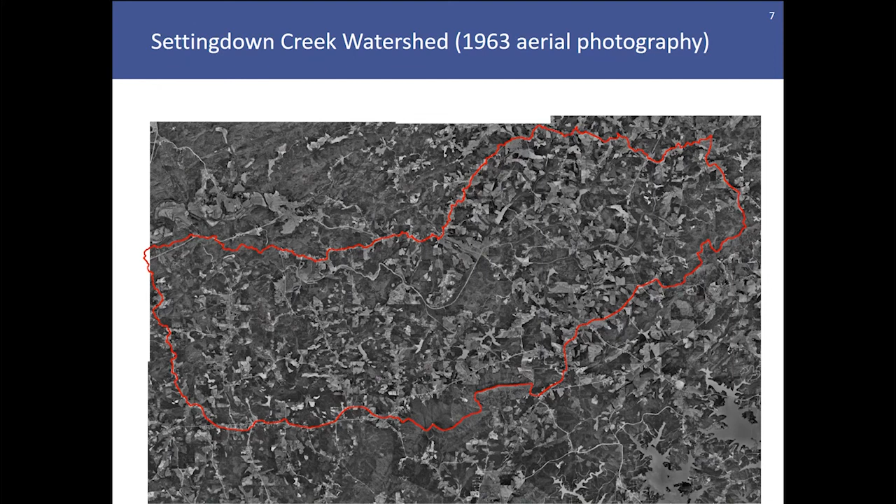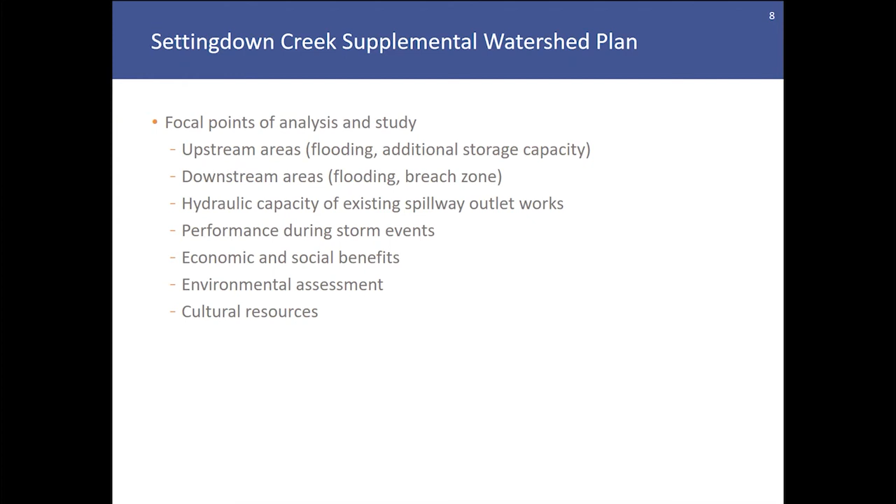As part of the supplemental watershed planning process, upstream areas of the dam were assessed for flooding, as well as to determine the need for additional storage capacity in the lakes. Downstream areas were also evaluated with regard to flooding and hypothetical breaches of the dam. The hydraulic capacity of the existing spillway outlet works was assessed during a variety of storm events. The economic and social benefits provided by the dam were quantified, and an assessment of environmental and cultural resources was also performed.

Settingdown Creek Dam number 59, which is the subject of this presentation, is a dam that meets Georgia Safe Dam Program criteria to be considered a Category 1, or high hazard potential, dam. This means that failure or improper operation of the dam would likely result in the loss of human life. The dam requires an operating permit from the SDP.

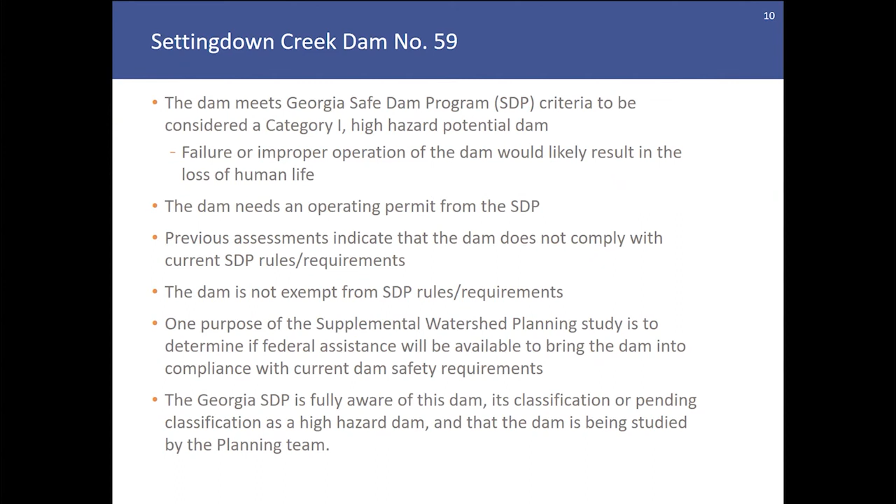Previous assessments indicate that the dam does not comply with current Safe Dam Program rules and requirements. The dam is not exempt from these rules, and a purpose of the planning study is to determine if federal assistance will be available to bring the dam into compliance with current dam safety requirements. The Safe Dams Program is fully aware of this dam, its classification or pending classification as a high hazard dam, and that the dam is being studied by the planning team.

Some original features associated with the design of the dam are that the dam was not originally designed as a high hazard dam. Development has occurred downstream of the dam, requiring changes to the original hazard classification of the structure. The purpose of the dam is flood mitigation, and a secondary purpose is sediment accumulation and storage.

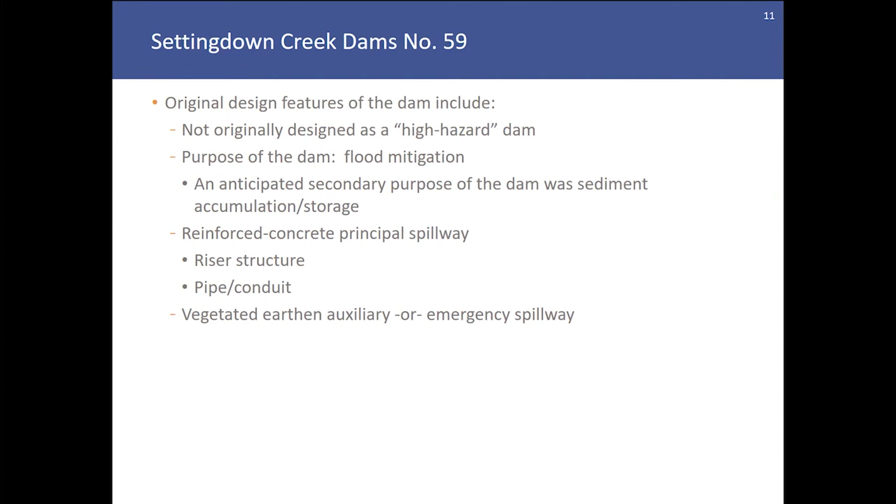The dam includes a reinforced concrete principal spillway system composed of a riser structure located in the lake on the upstream side of the dam, with a nearly horizontal pipe or conduit that conveys water from the riser structure through the earthen embankment and to the outlet channel at the downstream end of the dam. The dam also includes a vegetated earthen auxiliary or emergency spillway designed to pass flows associated with low frequency, high intensity storm events.

The dam is located adjacent to the Hampton Golf Club, south of Glenhaven Drive. Construction of the dam was completed in 1954, and the dam appears on the National Inventory of Dams with a surveyed height of 33 feet.

The drainage area at the dam is approximately 1.8 square miles, and the design storage capacity of the dam is 586 acre feet. That storage accounts for sediment storage below the normal pool elevation of the lake, flood storage between the normal pool elevation and the auxiliary spillway control section, and surcharge storage between the auxiliary spillway control section and top of dam.

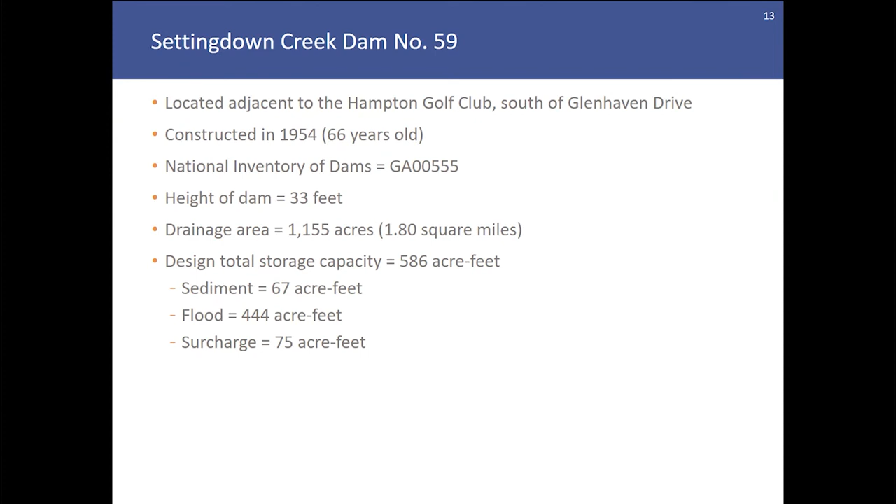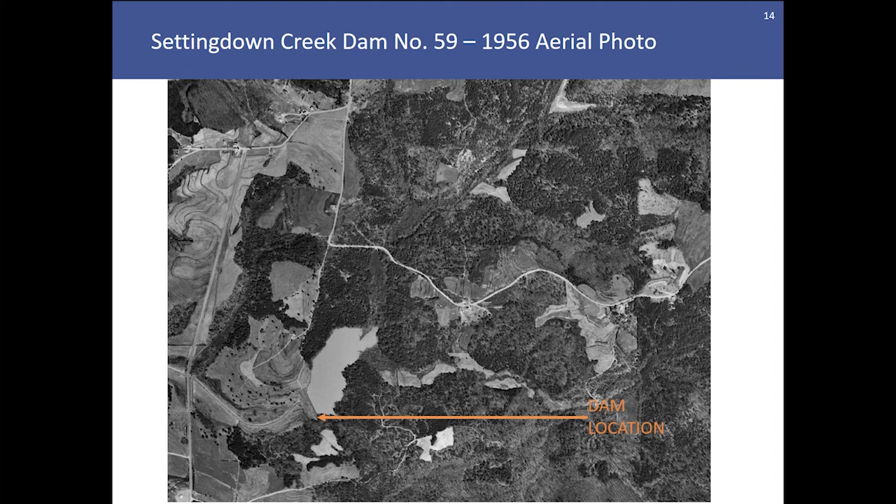Here's an aerial photograph taken in the 1950s, which also indicates the location of the dam. As you can see, there's been no development adjacent to or upstream of the dam in this aerial photograph.

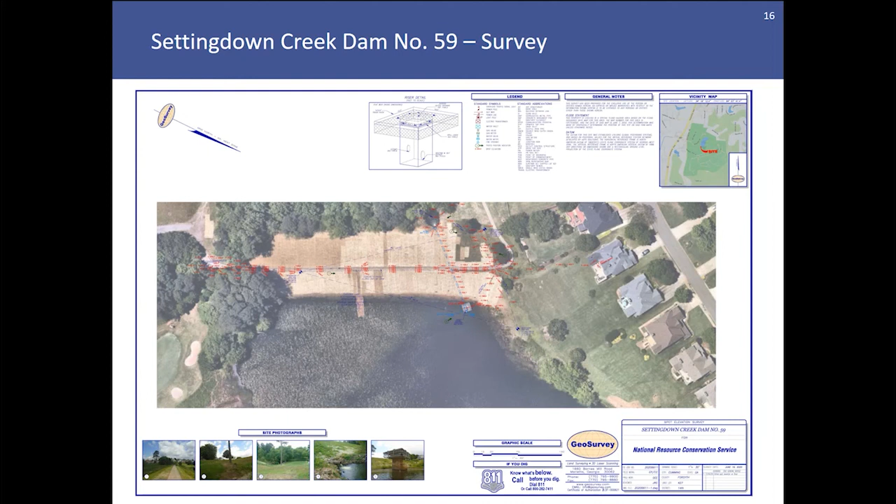This slide shows a topographic site plan of the dam. For reference, we're showing the principal spillway riser structure and pipe, along with the alignment of the auxiliary spillway. As you can see, the properties at the right side are immediately adjacent to the auxiliary spillway channel.

Also, the approximate limits of wetlands that were delineated as part of the environmental survey are indicated downstream of the dam at the top of the page. The lake would be toward the bottom of this view.

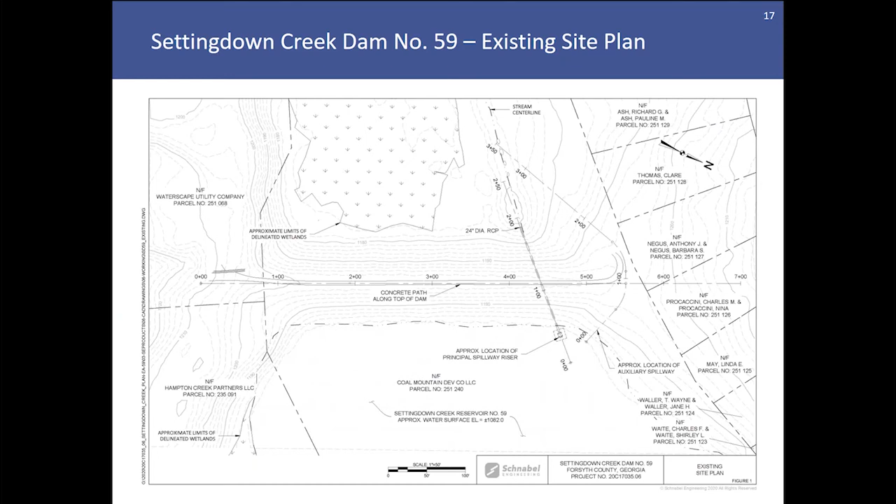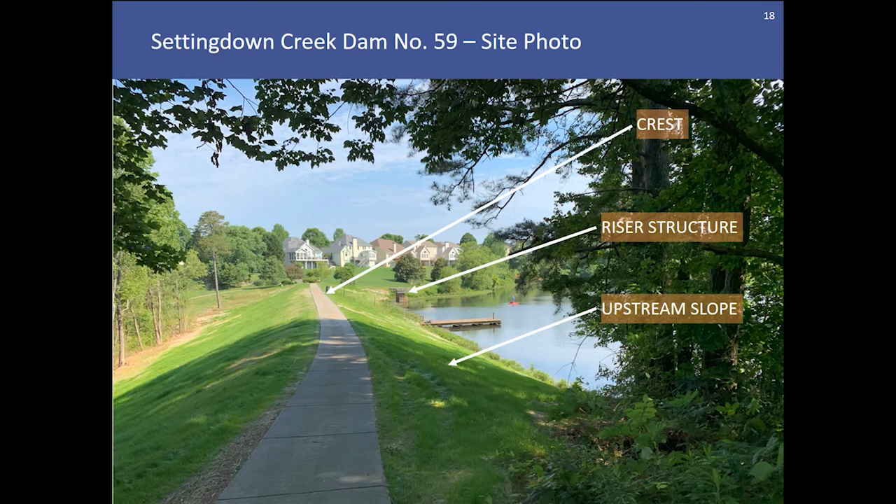We have a couple of photographs of the dam. This photograph is taken from the left abutment area at the crest, looking toward the principal spillway system and the residential homes. Indicated on this photo are the crest of the dam where the golf cart path is located, the riser structure, the concrete structure in the lake, and the upstream slope of the dam where the dock projects.

This photograph is taken from the downstream slope of the dam. As you can see, the downstream slope is in the foreground. The concrete principal spillway conduit outlet is indicated, and the riprap lined plunge pool is also shown in this photograph.

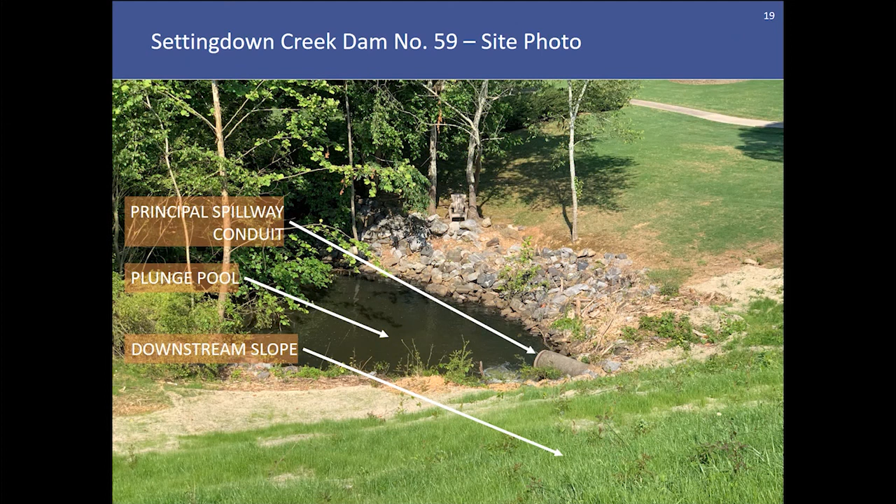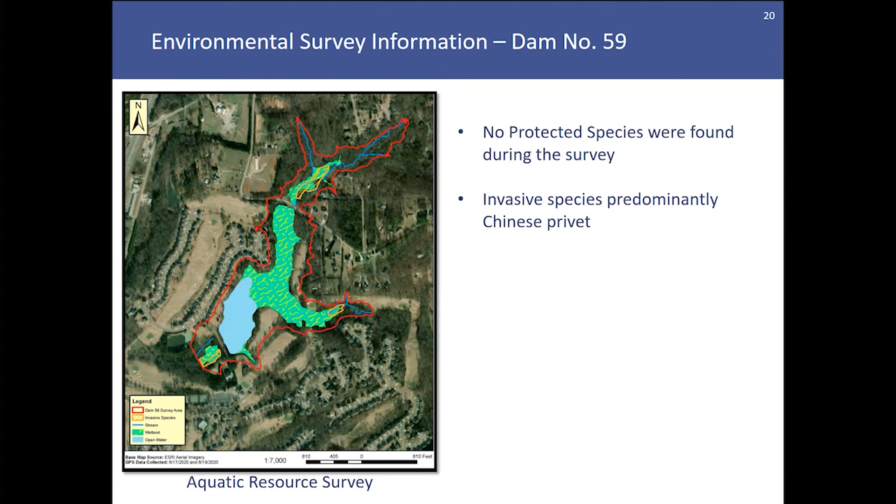As part of the planning study, an environmental survey of the dam and its vicinity was conducted. The aquatic resource survey exhibit shown here on the left side of this slide indicates the limits of the survey area, along with the locations of streams, wetlands, and open water identified by the environmental survey team. Invasive species in the form of Chinese privet were also indicated on this exhibit. The environmental survey found no protected species during the performance of the survey work.

A phase 1 cultural resources survey was also performed of the dam and its immediate vicinity. The cultural resource survey map on the left side of this view shows the location of survey transects and shovel tests that were performed as part of the survey. In addition to the field survey, a literature review of the project area, the dam area, was also conducted. No archaeological resources were recorded as a result of the survey work.

The dam, being greater than 50 years old, is technically eligible for the National Register of Historic Places, but its listing on the registry is not recommended.

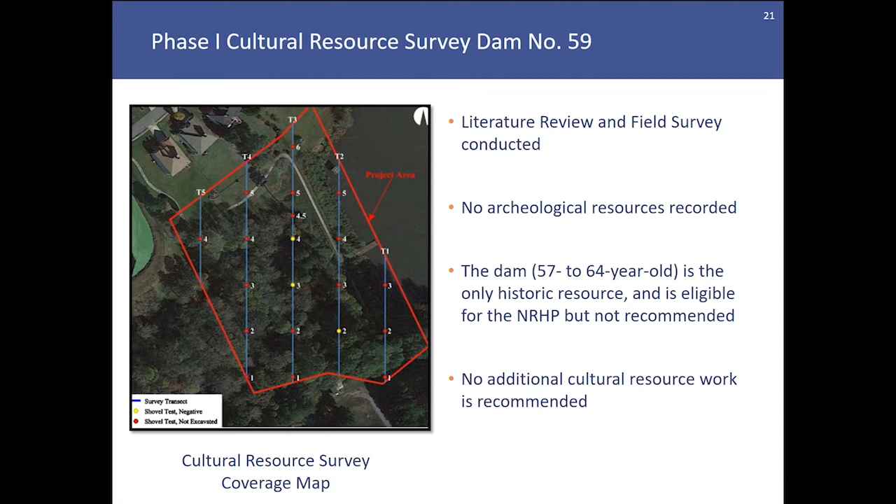The dam, although old, is not a unique or notable feat of engineering or construction. There are several other flood control dams, hundreds in fact, in Georgia and across the United States. So its historicity is not unique and doesn't merit listing on the Register of Historic Places in the opinion of the Cultural Resources team. The team concluded that no additional cultural resource work is recommended for this dam or project site.

As part of the evaluation of downstream areas, a dam breach inundation study and mapping were performed. This slide indicates the limits of a hypothetical sunny day breach of the dam. The inundation limits are indicated in blue, and the locations of potentially impacted structures are noted with red house symbols. Please note the dam is located at the right or eastern end of this map, and the breach flows would progress in generally an east to west direction.

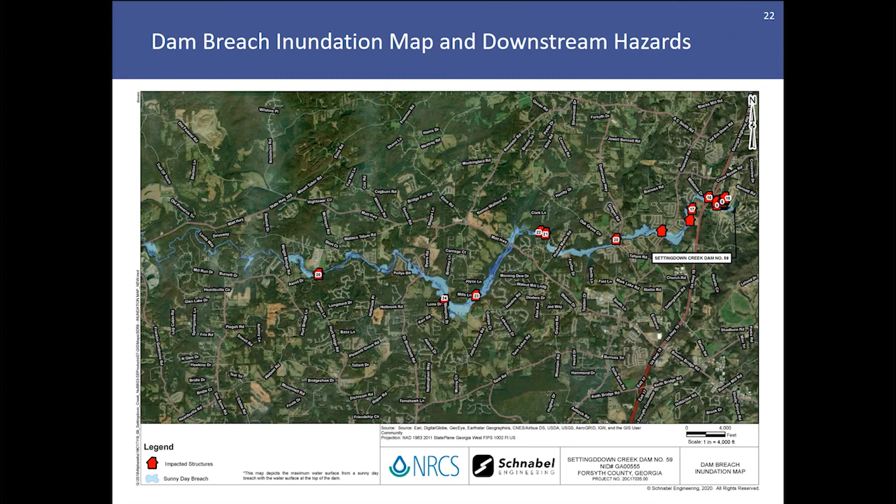In addition to the breach analysis, downstream flooding analysis was performed for the 2-year through 500-year storm events. The 100-year and 500-year storm limits are indicated on the map in yellow and purple respectively, along with structures that would be impacted in the event of these levels of flooding. The limit of study is shown at the left or west side of the map, and the flood analysis for the frequency storm events was terminated just downstream of the crossing of Settingdown Creek at John Burris Road.

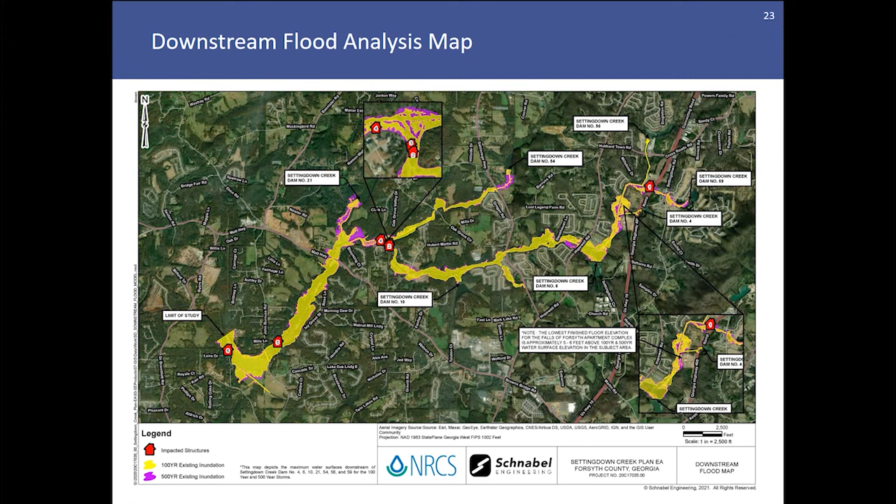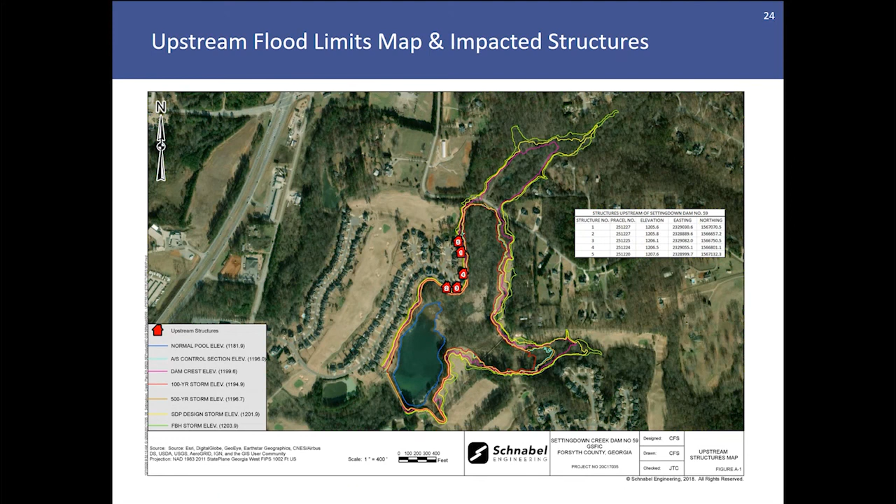A review of some of the existing deficiencies with Settingdown Creek 59: as stated previously, the dam was recently cleared during the summer of 2020 and is revegetating. An underwater inspection of the riser structure concluded that portions of the slide gate assembly are worn or corroded, meaning the gate operating system will likely need some attention. Portions of the riser concrete are cracked and or spalled, and a closed circuit television inspection of the interior of the principal spillway conduit showed that the pipe is in acceptable condition and can be used in the future in its current condition.

With regard to hydraulic deficiencies, during the Safe Dams Program design storm event, the dam overtops by 1 foot and the auxiliary spillway breaches. With regard to NRCS hydraulic criteria, the auxiliary spillway engages prior to the principal spillway hydrograph storm event, which is an evaluating storm event for auxiliary spillway locations.

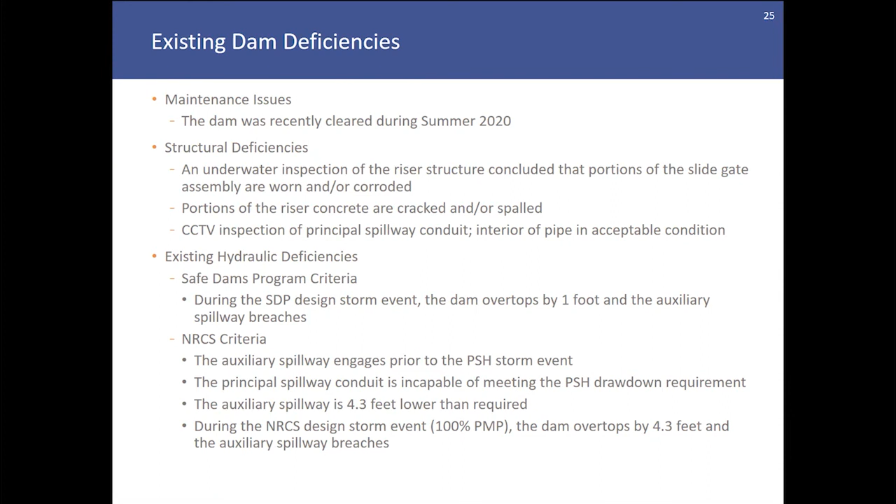The principal spillway conduit is incapable of meeting drawdown requirements. The auxiliary spillway is over 4 feet lower than what is required by NRCS standards. And during the NRCS design storm event, which is 100% of the probable maximum precipitation, on the order of 30 to 32 inches of rain in 6 hours, the dam overtops by 4.3 feet and the auxiliary spillway breaches.

In light of the deficiencies with the dam, the planning team has shortlisted 3 alternatives for addressing issues with the dam. These alternatives include a no action alternative, which would not take advantage of federal funding and would require that the dam be upgraded or breached in accordance with Georgia Safe Dams program criteria for a high hazard dam.

The planning team is required to consider a decommissioning alternative, which would be a complete removal of the embankment, stabilization of the excavated channel and resulting lake bed, and also consideration to flood proofing or relocating downstream interests.

The final alternative discussed in today's presentation is the future with federal investment alternative, which would entail a full NRCS rehabilitation of the dam to meet those requirements. It would involve improvements to the embankment, removal and replacement of the principal spillway system, and construction of a new auxiliary spillway capable of passing the required design storm events. We note that during development of the NRCS rehabilitation alternative, consideration was given to upstream non-flood control ponds, as well as uncertainties associated with climate change.

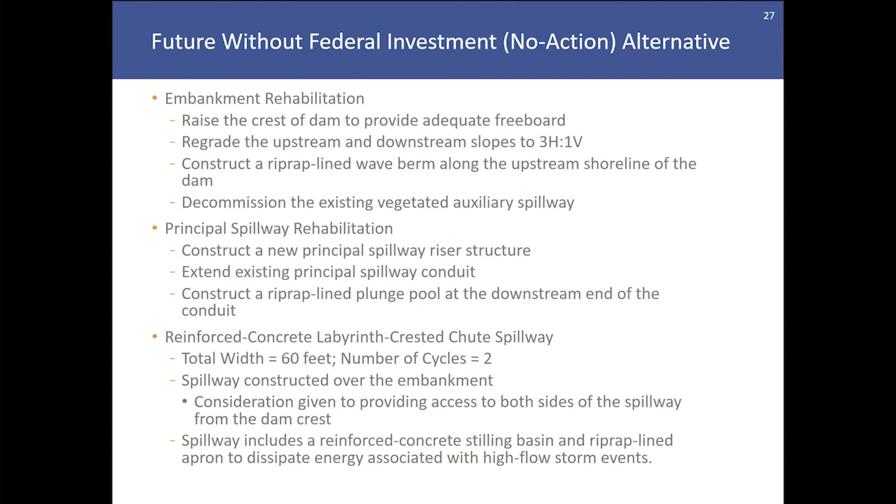Also note that this large spillway would not flow on a regular basis. It would only flow in the event of low frequency, high intensity storms greater than the 100-year and 500-year storm event.

Here's a site plan with the layout for the Safe Dams program rehab. As you can see, the principal spillway riser structure would be moved further into the lake to get the wave berm with riprap constructed along the upstream shoreline. The pipe would be extended, a new principal spillway plunge pool would be constructed, and the 2-cycle labyrinth spillway would be constructed over the embankment.

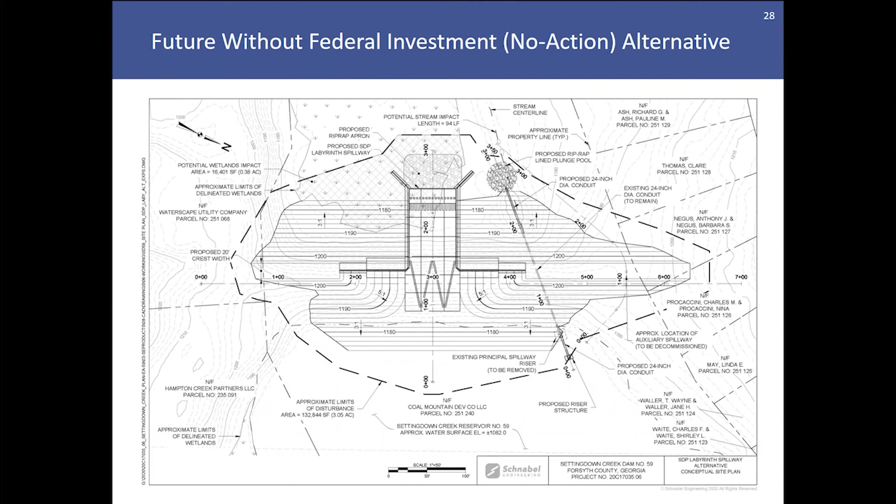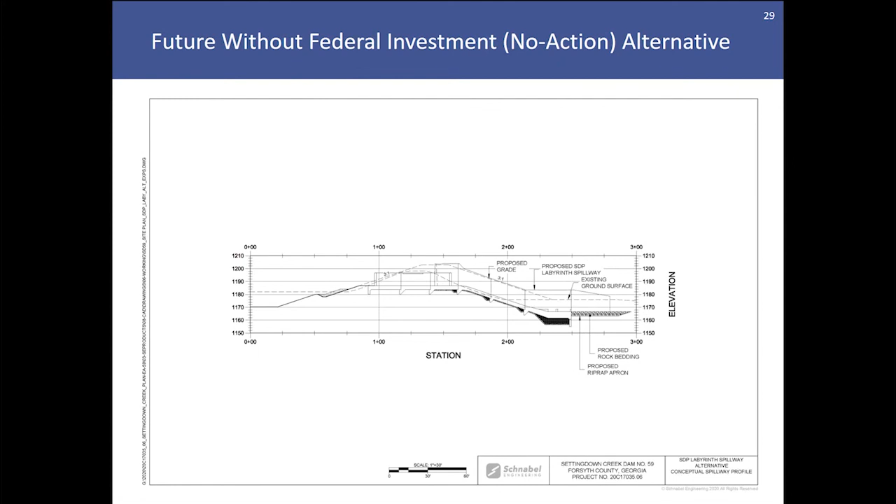This view indicates that we would have a ramp going down from either side of the dam crest, and access could go around the upstream end of the labyrinth weir to provide access to both sides of the dam. As mentioned before, this spillway would not flow on a regular basis. The normal pool would be established by the riser structure and the pipe, and the auxiliary spillway, in this case the labyrinth spillway, would only flow during large storm events.

The planning team had to assess a decommissioning alternative for the dam. This process would involve removal of the majority or all of the existing embankment along with the principal spillway system. The floodplain would be reconnected to its original grade prior to the dam being constructed, and the lake bed would be stabilized with vegetation, with the primary channel through the old dam stabilized with riprap.

Decommissioning the structure would improve flooding upstream of the dam. As we stated earlier, there's really nothing that's impacted upstream of the dam by flooding, but the downstream flood benefits, which are great in this case, would be lessened or lost. As part of the decommissioning alternative, the planning team evaluated and quantified the downstream benefits currently provided by the dam, as well as what the loss of those benefits would mean to those downstream interests.

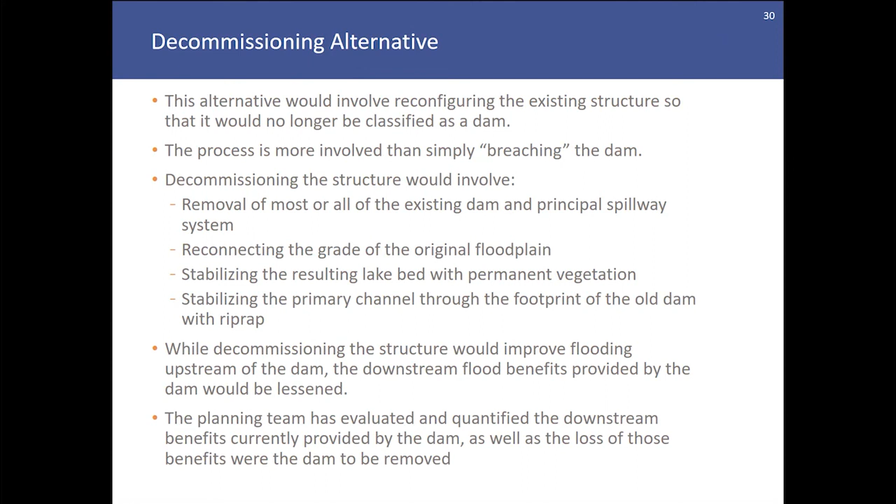Here's a site plan of what the decommissioning alternative would look like. This alternative would require the complete removal of the dam. Consideration would have to be given to how the cart path would be addressed in this alternative. As you can see, we're showing the riprap through the primary channel where water would flow on a regular basis, but that's kind of what the site plan would look like.

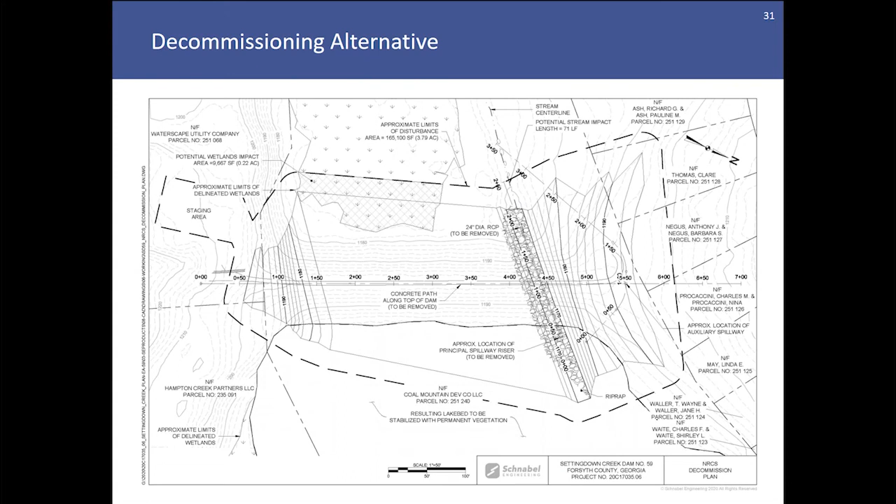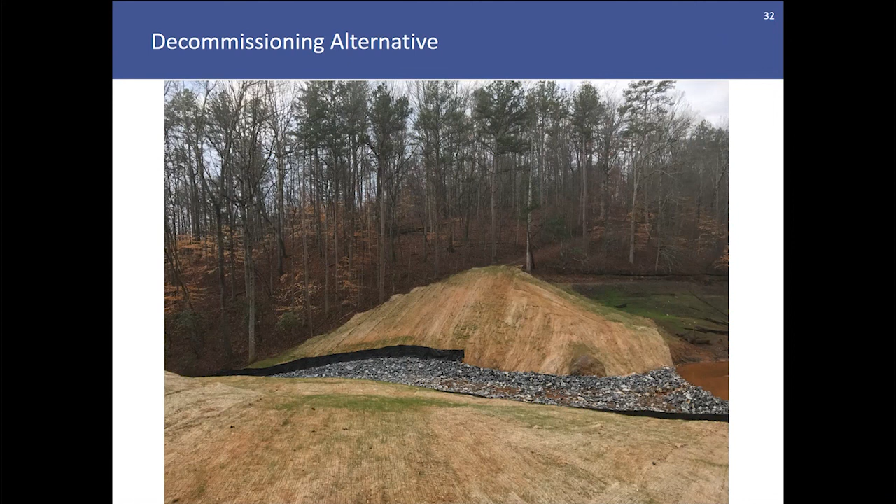Here's some examples of a dam removal to give you some perspective on that. You can see a large portion of the earthen embankment has been removed. The excavation slopes have been stabilized with matting and vegetation, and the primary channel through the dam has been stabilized with stone riprap.

The final alternative that we'll talk about today is the future with federal investment. This alternative would allow the project sponsors to enter into an agreement with the federal USDA NRCS to cost share the rehabilitation effort for this dam.

This alternative would be similar to the no action alternative, except a little bit larger. The dam would need to be raised to accommodate 100% of the design PMP, which is the design storm for the NRCS. The upstream and downstream slopes would need to be regraded, the wave berm would need to be installed, and the existing vegetated auxiliary spillway would be decommissioned.

A new riser structure and extension of the principal spillway pipe would be performed, and a new plunge pool would be constructed at the downstream end of the conduit.

Similarly to the no action alternative, a labyrinth crested spillway would be required. Given the intensity of the design storm in comparison with the Georgia Safe Dams program design storm, the NRCS labyrinth spillway would need to be larger, with a total width of approximately 136 feet, composed of 4 cycles.

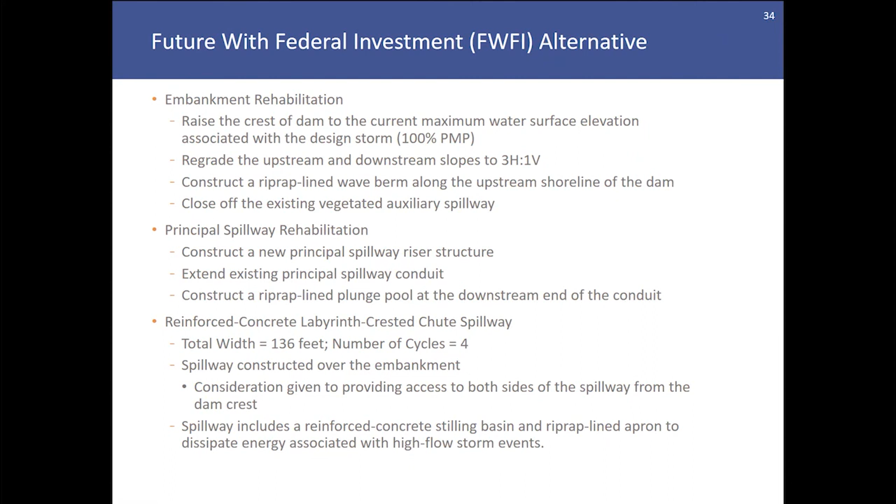The spillway would also have a stilling basin, a riprap lined apron to transition flows from the concrete spillway to the natural stream channel. Here's a site plan with a layout of the new spillway.

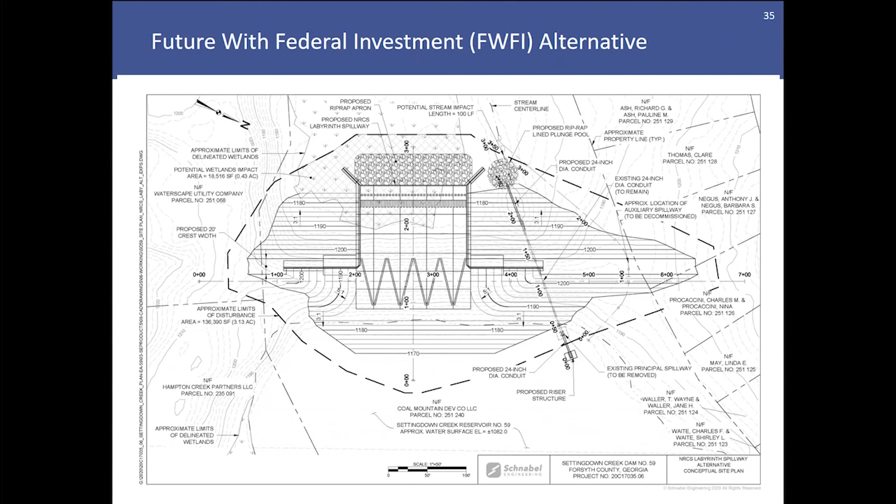You can see some similarities with the no action alternative. The major difference is the size of the labyrinth spillway, as well as the raised height of the dam, which would be a little bit higher in this case.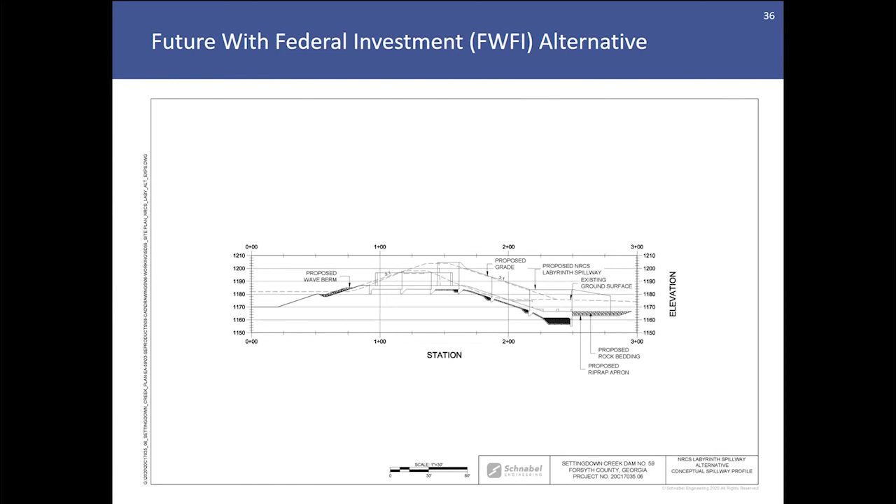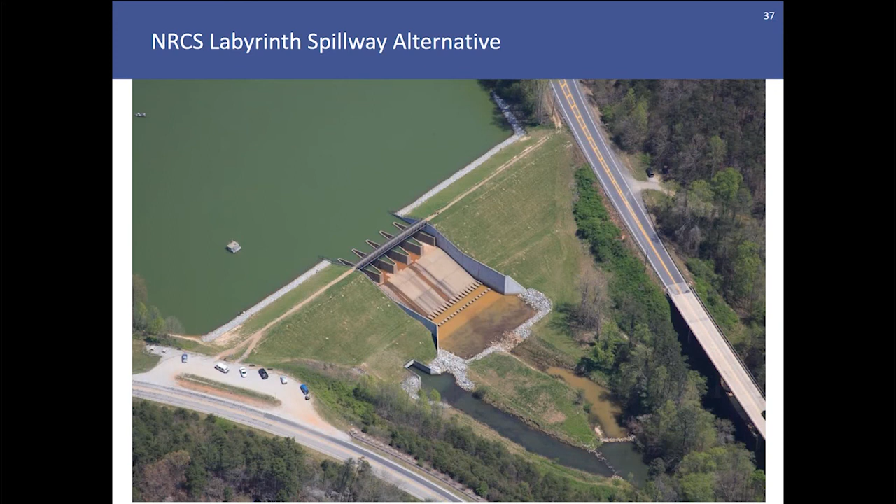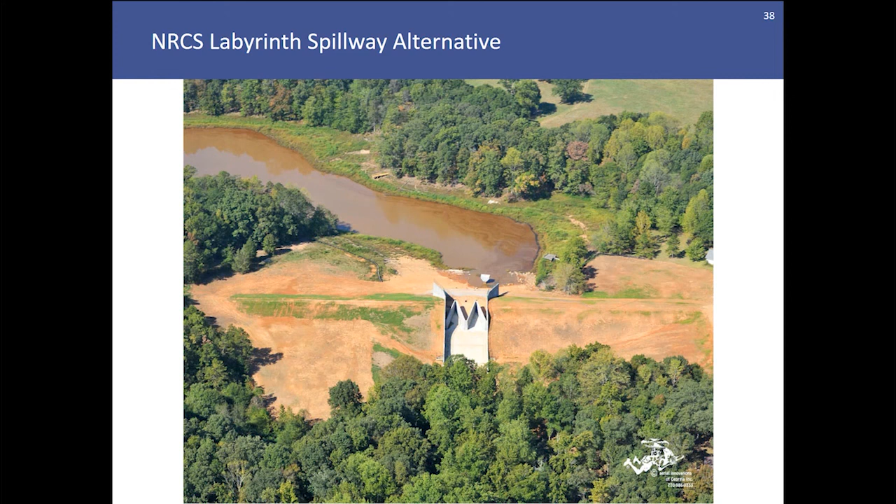Based on the results of the planning study and discussions with the project sponsors, including representatives of the Soil and Water Conservation Commission and the state NRCS, the locally preferred alternative for this dam is being presented as the future with federal investment alternative. This would be rehabilitating the dam to meet NRCS criteria and take advantage of federal funding to do so. The dam would be raised, a new principal spillway riser structure would be constructed, and the larger 4-cycle labyrinth spillway would be constructed over the crest of the dam.

This alternative takes advantage of federal funding, and based on the cost share percentages would be the most advantageous from an economical perspective for the project sponsors.

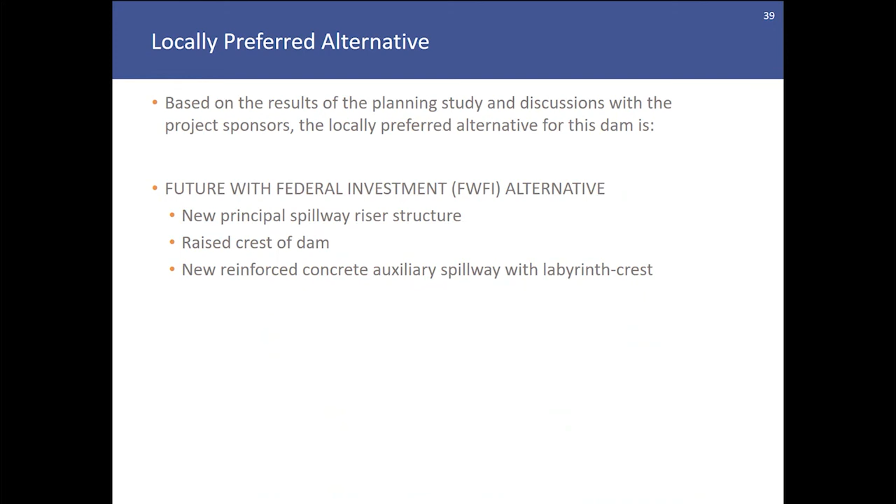As stated at the beginning of the presentation, the public interest and participation in this project is very important to us. We invite project stakeholders to submit questions and comments regarding the development of the plan and the alternatives discussed today to us for consideration.